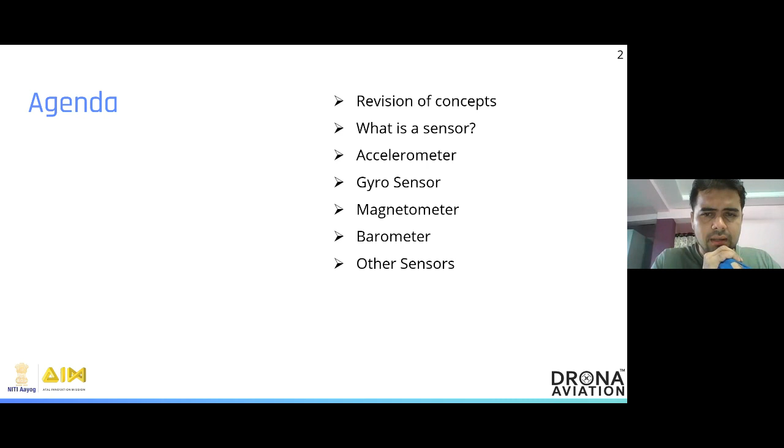So I believe the last time we broadly discussed what is stability. I wanted to quickly brush up the concepts from the last time: the broad concept of what is a stable system, what is an unstable system, and what's a neutrally stable system. A stable system is any system that, when disturbed from its equilibrium position, comes back to where it started from.

Like if you have this ball in a bowl, and if you shake it, the ball will oscillate for a while before coming back to its stable position. For unstable systems, we have a ball at the top of a peak, which, if disturbed from that position, will roll away and not come back to the original position. If disturbed from its equilibrium position, it does not return back to its original state.

And finally, we have the neutrally stable systems, systems that when moved from their position of equilibrium do not come back to their original state, but attain a new equilibrium. Which also brings me to the interesting question we had earlier. Is man a stable system or an unstable system? As a man or a girl standing on their 2 feet, is he or she a stable system? If disturbed from their equilibrium position, will they come back to the same equilibrium, or will they fall off?

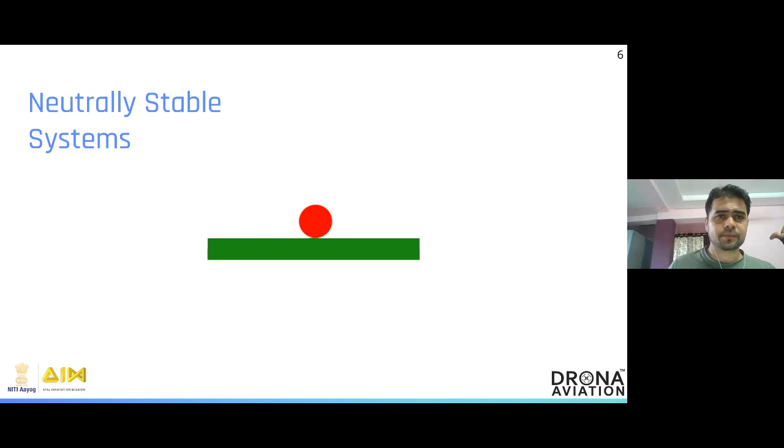Now, before I jump into that, I was wondering if we could quickly check out the concepts in the process of stabilizing any of these systems, right? If you check out a simple drone, let me quickly pick one up and show you guys. Just give me 10 seconds. I'll quickly get a drone.

Awesome. So what you see in my hand is a drone. I hope you guys are able to see me. Yes. Right. So assume this is a drone. Well, it still misses out on a few motors, batteries, and everything else. This is just a frame. If this is a drone that's flying stably in the air, and if you happen to disturb this a little bit,

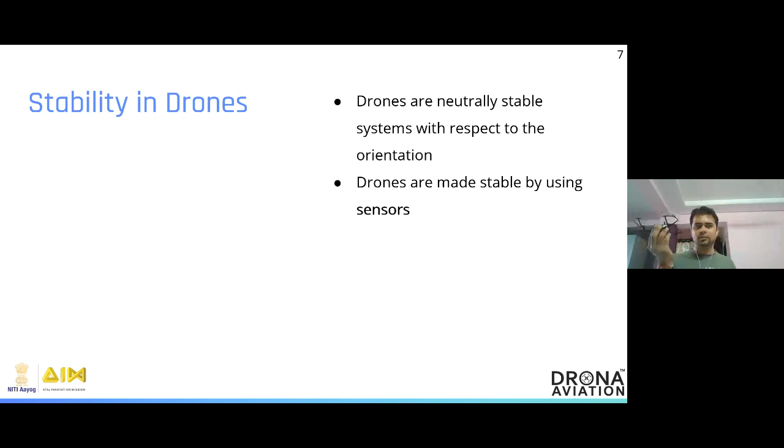drones are naturally neutrally stable systems. What it means is they will get disturbed and they will continue to go on the path and find a new equilibrium, and then crash onto the ground. Unfortunately, that is not what we want in our drones. What we want is a drone that's flying stably. Whenever it is disturbed from its position of equilibrium, it should be stabilized by internal factors to bring it back to its original steady state.

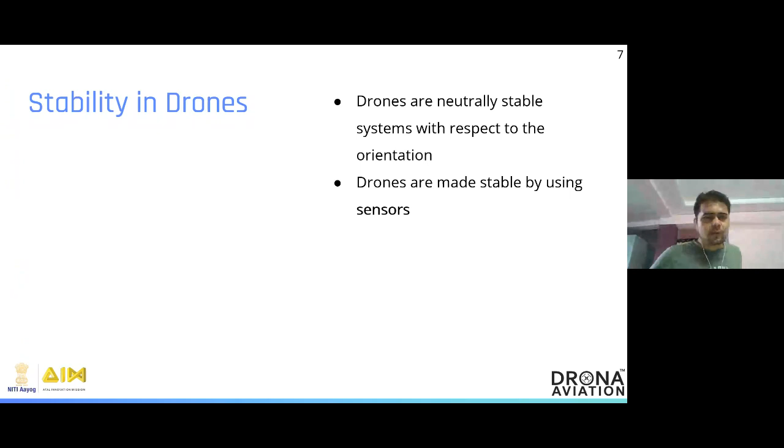How do we do that? We do that through sensors. These are a wide variety of sensors that drones employ in their attempt to sense their surroundings as well as stabilize the entire system. Essentially, a sensor is any device that detects and responds to input from the environment around it. As you see on the screen, it could be light, heat, moisture, pressure, or it could be angles, or magnetic field, or anything else.

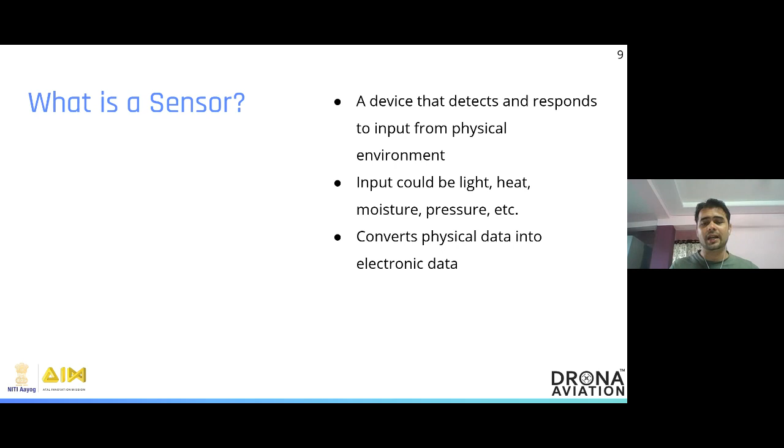All of these, be it the light, heat, the magnetic field, are physical phenomena. These sensors convert this physical phenomenon into electronic data, and we use this data to go ahead and stabilize the drone. Now, what sort of sensors do you commonly find in a drone for stabilizing it? The first one that you have is the accelerometer.

Now, if this was a face-to-face class, my first question to you would be, what is a typical device where you see an accelerometer regularly? I'm going to give you 15 seconds to type out your response to this. Just let us know what sort of devices you see an accelerometer regularly in.

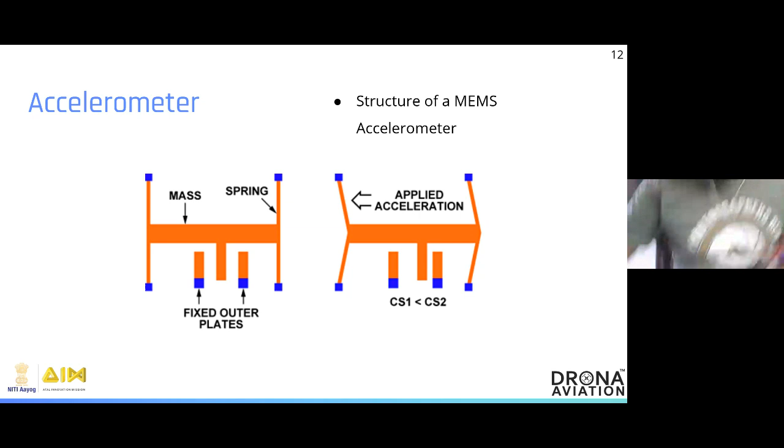The way this works is, let me see if I can pick up an IC and show you. Just give me 1 second. All right. I hope you guys can see me.

Yes. So if you can see, this is the controller board, the CPU or the brain of the drone. Now, somewhere down here, you have the accelerometer. It's a very small IC, integrated circuit, that is able to do these measurements.

What essentially happens is, you guys might be familiar with a mass and a spring. When you pull it in one direction, it just snaps back. So in the MEMS accelerometer, whenever that IC experiences any sort of acceleration, it gets pulled in one direction. Now there is a concept called capacitance, which you guys may not be familiar with right now, but that's okay.

When the accelerometer experiences acceleration in a certain direction, as you can see on the screen, the distance of the metal in between the two different pieces of metal here changes, because of which there is a concept called capacitance. This is a concept that you will be learning in, let's say, 11th or 12th standard.

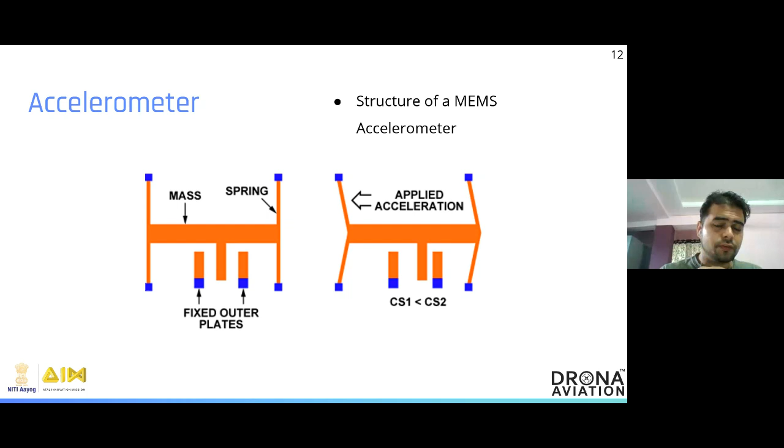Now coming to the next one. So one of the four sensors is the accelerometer. Then you have the gyro sensor. A gyro sensor is something that helps you understand the angular rate. It's an angular rate sensor. It measures the rate of rotation around different axes.

Let me give you a very simple example. Let me see if I can open up a video that actually talks about toilet flush, but you will recognize how useful it is in the case of a drone. So give me just a moment. All right. This is a very interesting video. It's a slightly longer 8-minute video, so I'll give you the premise of what the video is about.

The premise is this is Destin, and he was very curious whether, when you flush your toilet, the water swirls in a clockwise or anti-clockwise direction. To save some time, I'm going to talk about it. In this experiment, he does a very controlled experiment wherein he puts up a really large pool, opens up the bottom at the center, and tries to see which direction the water swirls in. So I'm going to fast forward all of this.

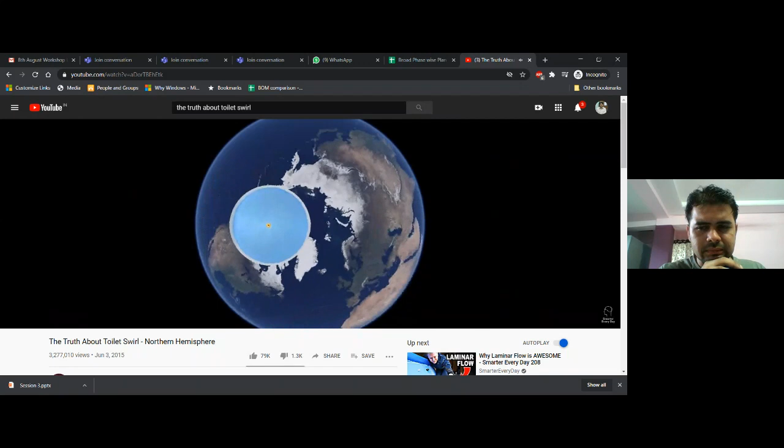Sir, the audio is also not playing.

All right. So what he's telling you is, imagine this pool magnified on the northern hemisphere, rotating. The outside goes at a slightly higher pace and the inside at a slightly lower pace, because of which you see the anti-clockwise motion of the water particles. Why is this important? This is caused by something called the

Just a minute. Let me try to share my screen quickly.

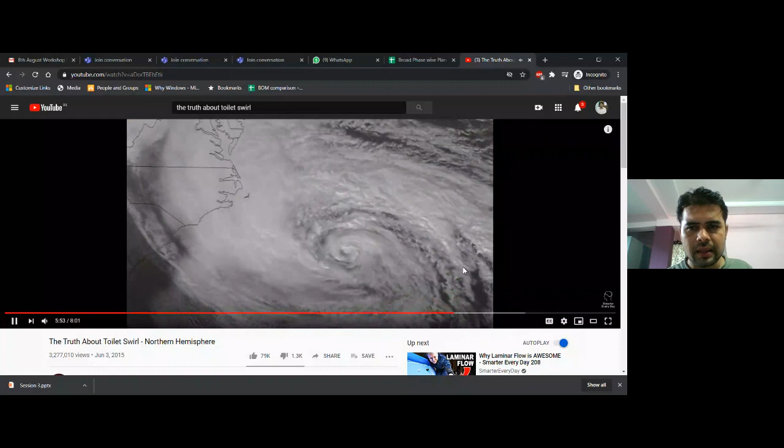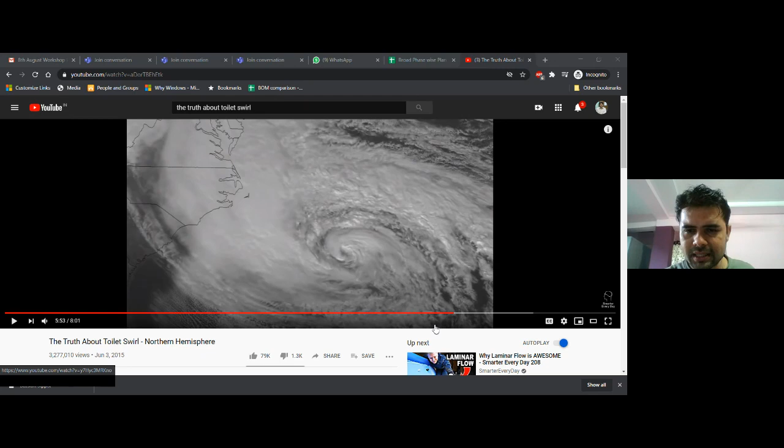So if you do the same experiment in the southern hemisphere, you would see that the pool would actually swirl clockwise. This happens because of something called the Coriolis force. Let me change the screen that I'm sharing once again. Okay.

Yes. So basically, what you see is whenever any body is rotating, in this case, as we saw, the Earth is rotating, every object that is on it, or if you are in the frame of reference of that rotating object, you see that the bodies around you experience something called the Coriolis force. And that Coriolis force depends on what rate your body is rotating at. Now, how is it useful in something like drones?

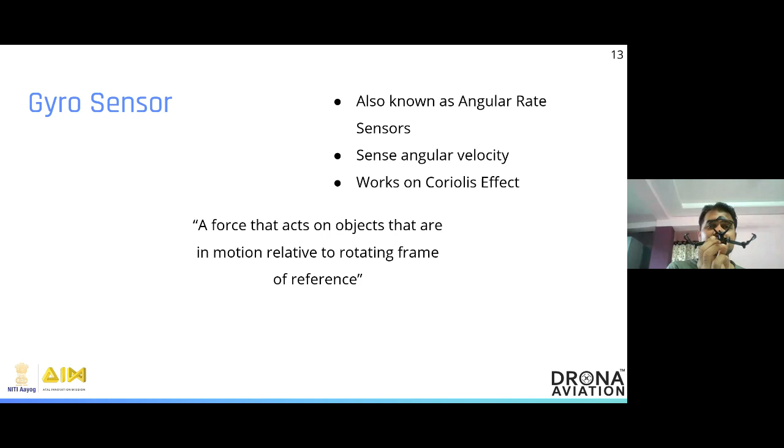So when you have a drone and it is rotating like this, your gyro sensor is able to measure how fast the drone is rotating along this axis, this axis, and this axis, right? This helps the drone to detect that it is not in an equilibrium position, and then it is able to correct it. Let's say if the drone detects that it is moving like this without being instructed to do so, it can course correct and bring itself to equilibrium, right?

That is broadly how it works. As mentioned in the deck, just check out the video of the truth about the toilet swirl. It's a very interesting video. Check out the full video here.

What you also have, this tells you a little bit more about the structure of the MEMS gyro sensor, where you have a mass in the center and the inner frame, so that when it experiences the Coriolis force because of the rotation, that allows you to measure the rate of rotation of the drone and then correct itself accordingly.

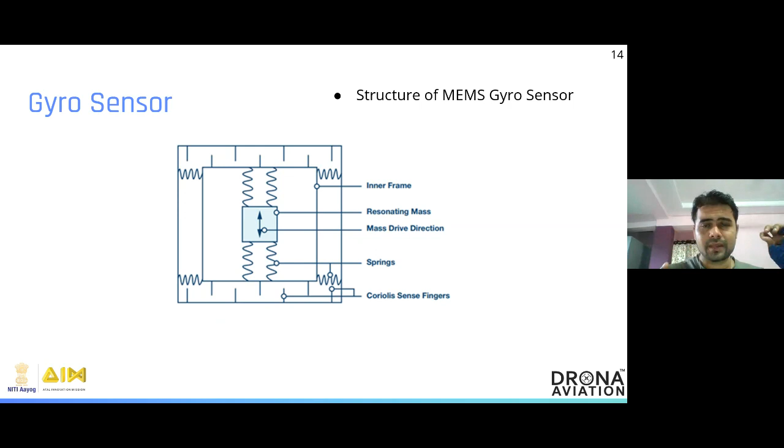The third one is the magnetometer, and there's no prizes for guessing what it does. What the magnetometer does is it essentially finds out how you are oriented on this planet Earth. Let's say this is the front of the drone. The magnetometer always keeps an eye on which is the front side. So what is the angle between that front side and the magnetic north pole?

When the drone starts yawing without being instructed by the controller, the magnetometer detects that angle change. Let's say this is magnetic north and this is where the drone's front is. So if the drone starts yawing without being instructed to do so, the magnetometer can determine that the drone is doing so, and it will send instructions to its motors to stabilize the drone and fix it accordingly.

But all of us are able to stand properly on the ground. Why is that the case? That is because we have a gyro sensor within us. If you check out these two ears, there is a pathway that connects them through the head. These pathways have something called the inner ear fluid.

So when you shake or start falling down, the inner ear fluid moves within that tube in this direction, and it tells your body, hey, you're falling in a certain direction, you're rotating in a certain direction, and it very instinctively instructs your body to correct yourself, maybe put a leg out or your hand out somewhere and try to keep yourself stable. This is another example of how you stabilize an unstable system.

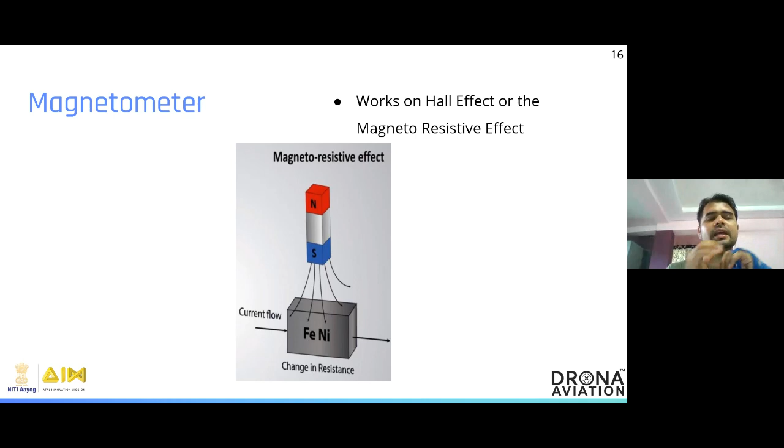Right. So again, coming back to the magnetometer, what it does is it works like the compass, and it works on something called the Hall effect or the magnetoresistive effect. All right, the final one in this is the barometer.

Again, if we were all together in a class, I would ask you guys, what do you think we would possibly use it for? But why don't I give an answer anyway? The barometer is something that you use for measuring the air pressure, yes. But I assume at least a few of you had a chance to go to some high altitude places like Ladakh, or other places in the Himalayas. You might have felt a little clogging of your ears or maybe a headache or something. That is because the air pressure in those areas is extremely low.

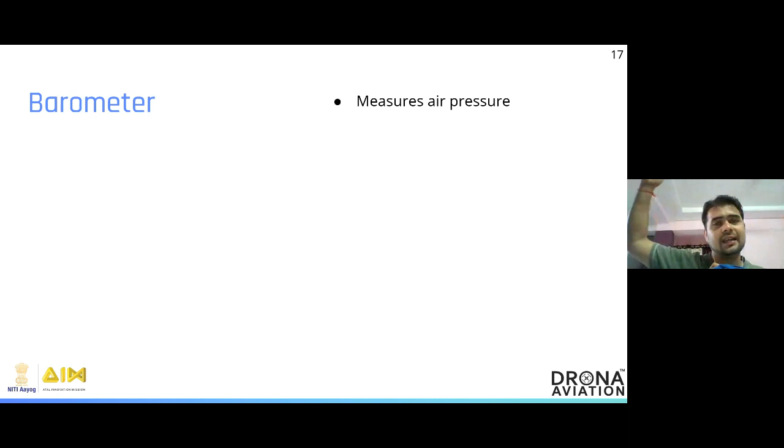What happens is as you keep going up, the air pressure keeps going down. So if you can measure the air pressure well, you can take a fair estimate of what height you are at. That is exactly what the barometer does. Now, in case of a human body, if we climb up a couple of stairs, we can barely make out the difference in air pressure because we are not that sensitive. We can only feel that difference in pressure if we climb a really high height like Ladakh or higher than that. In case of a barometer, it is extremely sensitive.

So even if you move the drone by a few centimeters, the barometer is going to sense the difference in the air pressure. And that's how it's going to know what height it is at. And if the drone realizes that it has gone up or down without the remote control instructing it to do so, then it's going to correct itself and come back to its original position. If it went down, the controller board will instruct it to come back up. If it goes up, the controller board will instruct it to come back down.

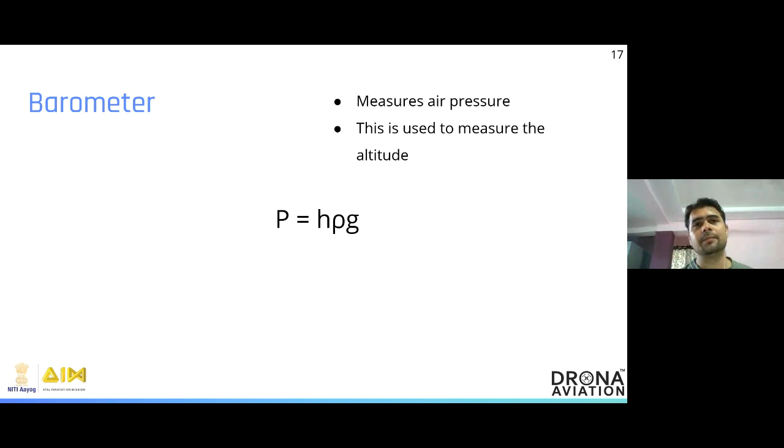Where does this whole thing come from? If you have checked out the formula for pressure, pressure is equal to h rho g, that is height into density of the fluid, which in this case is the air, and into g, which is the acceleration due to gravity. So the pressure is directly related to the height at which the system is. So these are broadly some of the important sensors that you would want in your drone if you want to fly it stably, right?

Some of the other sensors that you can integrate into your drone are something like the laser sensor. What the laser sensor can do is it can shoot a ray of light onto another object and have it reflect back to the sensor, which helps it to determine the distance between the two. There's also light detection and ranging, which is LiDAR, that helps with similar data. There's radio detection and ranging, which uses radio waves, and sonar pulse distance ranging, which is ultrasonic and uses sound waves to find that distance. Right.

Once you start working and enter the industry, or you're a drone service provider or a drone manufacturer, you will be using something like LiDAR a lot, where the drone will be flown over large areas of land with a LiDAR sensor. It will be able to clearly tell you the topography of the land. Do you have buildings in between, or mountains in between? Do you have hutments in between? And it will be able to tell you extremely precisely with a 3D model of that entire terrain that you flew it over, right? And that is very useful for the industry as we are looking at it today.

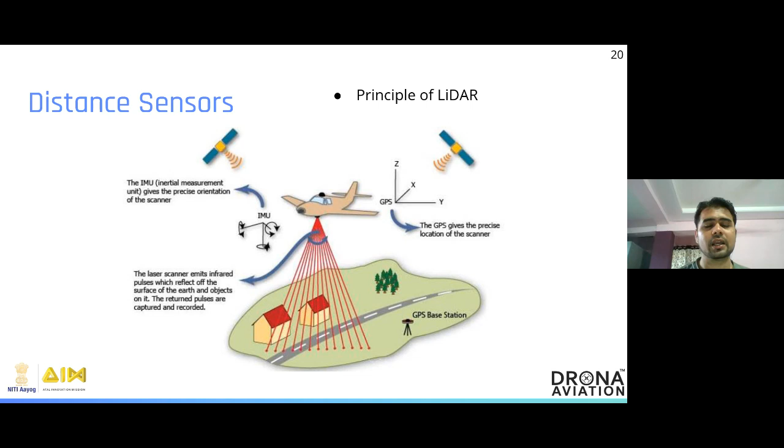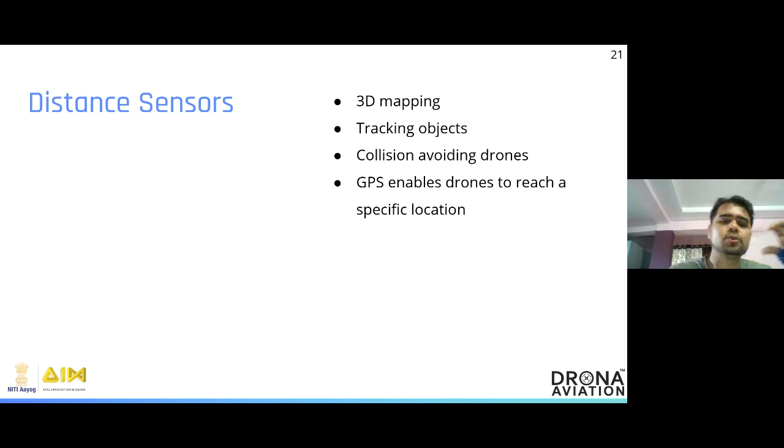Distance sensors that we have are used in tracking objects. So for example, let's say you are looking at multiple drones which are flying together. The laser sensor can actually detect whether you're going to crash onto a wall or onto another object, and then avoid that from happening. Something like a GPS also helps you find out your location on the earth and then work accordingly.

What we have also seen are thermal sensors, especially thermal cameras, IR sensors. These are extremely useful when you are looking at an application like the firefighting drone. This is used significantly these days both in firefighting as well as fighting terrorists. You're looking at drones that can fly into different areas. These will be able to pick up the heat signatures of the objects in front of them. So for example, let's say you have a man who's wearing a coat and standing there, and you have a mannequin that's also wearing a coat. Both of them are facing the other direction.

When you see the coat that has the mannequin on it, with a regular RGB camera, your photo camera, you may not be able to distinguish, but with the thermal camera, the man is radiating a unique heat signature that helps you to understand that, hey, this is a person here, this is a human being, or this is a living being.

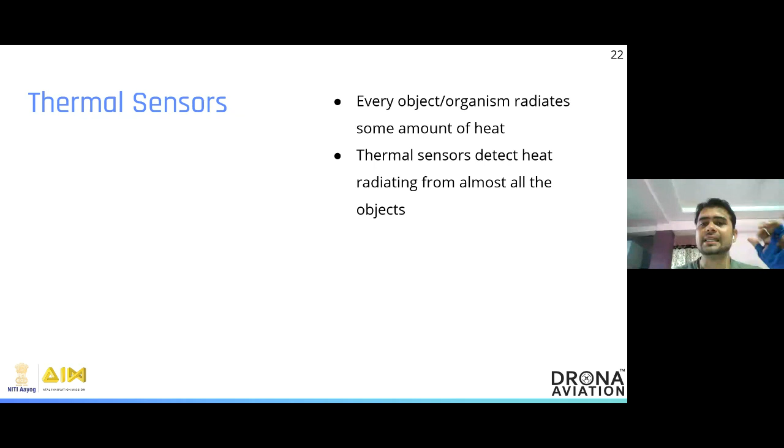Or maybe this is a dark room, but when I fly in a drone I can see that there is a man sitting there, he's probably a terrorist and I need to take care of it. So ideas like these can be implemented when you have a thermal drone.

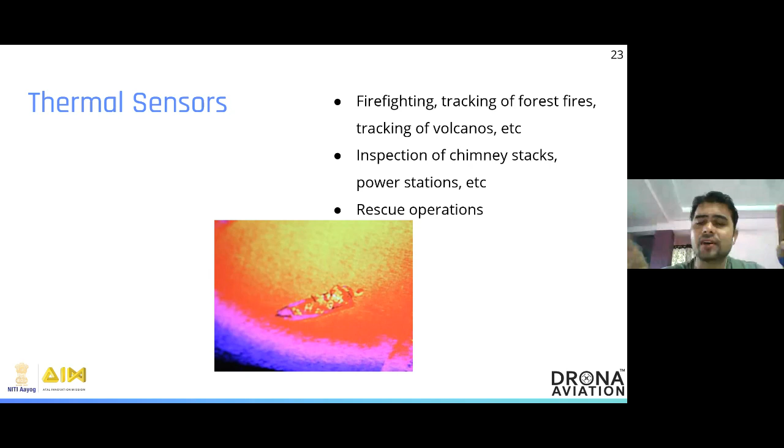You're seeing this as an image taken from a drone with a thermal camera in case of a boat that was stuck late at night, in the middle of the sea where you have no lights whatsoever around. In such a situation, you can have a thermal camera that can detect something like this and help you out. Chemical sensors.

In fact, if you check out our YouTube channel, you will see that we have had one student like one of you who used the drone to sense gas leakages with a sensor which was on the drone. A simple idea being, I don't know if you guys are familiar that a few years ago in Mumbai, there was a dumping ground that caught fire. It caught fire because there was a lot of methane gas generation there.

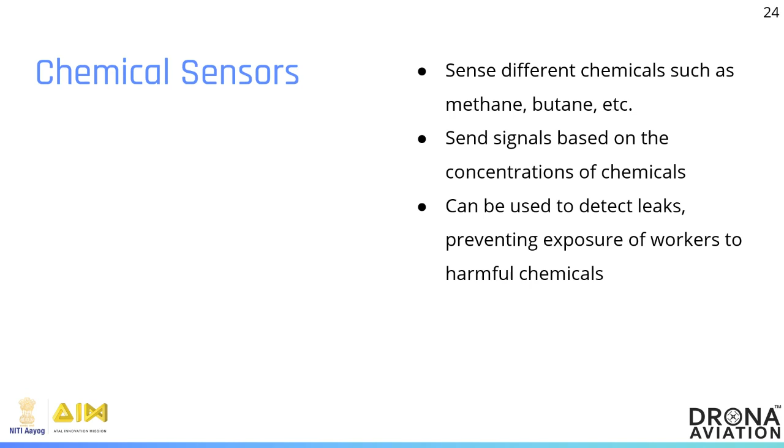And so the idea that this guy came up with was, why can't we have a gas sensor attached on top of a drone? So you can fly the drone in that entire area, whichever area has the methane gas, it will flag it off and help us let it go into the air, instead of catching fire.

So broadly speaking, coming back, there are multiple sensors that we work with. Some of these sensors are used to stabilize the drone, give it clearer commands on how to work. In fact, the GPS receiver is also a sensor that tells you where you are and holds your position. So sensors like the GPS sensor, the altitude sensor, the gyro sensor, accelerometer, are important for you to give stability to your drone.

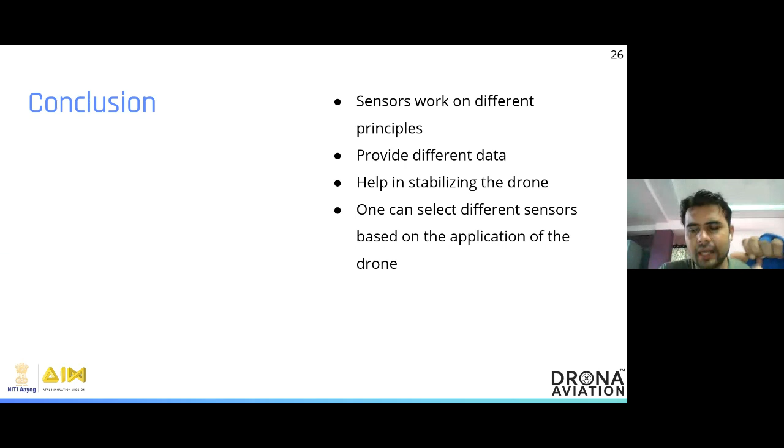And then there are other sensors that are used to detect other ideas on top of it. So the selection of sensors that you will do will depend on what application you are looking to build on top of the drone. It will entirely depend on that. That's broadly it. And why don't I open up for some questions from the audience?

Hello, Apurva sir. It was a very interesting session, and we have a lot of interesting questions from the audience today. The first question is by Amartya. He says, I have read the ATL drone book. In the book, they say that we need 4 sensors: gyroscope, accelerometer, magnetometer, and barometer. But if we are going to control the drone, then we will not require any sensors. Could you please answer his query?

Okay, so if you go to the toy market and buy these really low cost drones, what you say is true, these drones will have only one sensor, which is the gyro sensor. Now, the truth is also that without a sensor, you cannot have a multi-rotor drone that will fly. It will just flip and fall down, right? Because you're not going to control individual motors, you cannot have a drone that will fly with absolutely zero sensors. So you will at least require one sensor, which is the gyro sensor, for flying the drone.

However, flying a drone with just a gyro sensor is extremely difficult. It is difficult because, number one, you don't get enough data for you to understand the position of the drone, be it the angle of the drone as well as angular velocity. You don't get clear data for you to adjust for it. So you're going to struggle very badly when you're flying the drone.